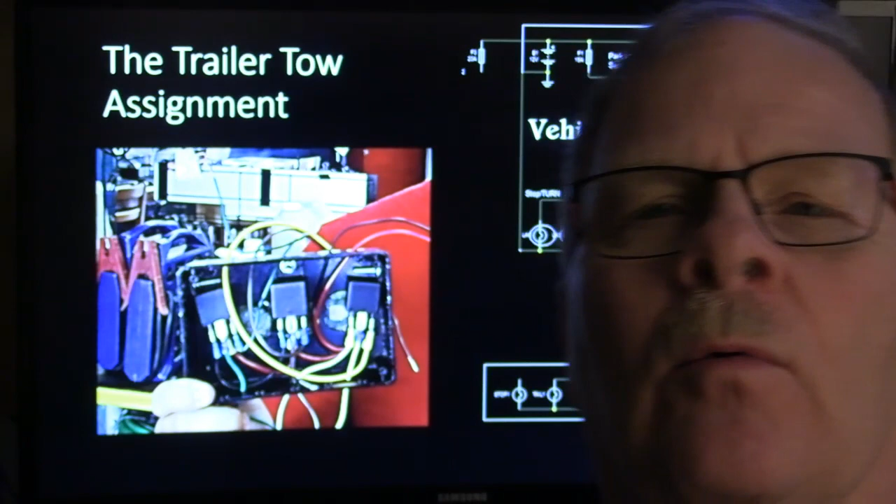What I did whenever I was teaching, well, when I was working at the dealership, I've mentioned before that if you hook up a trailer tow package by using Scotch locks and go into the wire feeding the tail lights particularly—turn signal not quite such a big deal, but tail lights—if you Scotch lock into that little 22 gauge wire feeding the lights on the car and try to pull a bunch of trailer marker lights, and you drive a long way to your fishing trip, 4, 5, 6 hours, sometimes it begins to cause all kinds of wiring problems.

But what I taught my students to do—I had an exercise that was part of their final. I had 3 relays in a box, and terminals they could crimp and plug in. I would get them to build a trailer tow package right here. This is basically just for training purposes, not one like you'd put on the vehicle. If you were putting it on the vehicle, you'd use a smaller box. But this one technically would work—it's just cumbersome because I needed to give them room to work. I had a picture of it on the worksheet so they could tell how they were supposed to do it.

But first I would make them draw a schematic. I had this representing the trailer, this representing the trailer tow package, and this representing the vehicle with the lighting circuits on that. One of the things they always seemed to struggle with was trying to figure out how to get power.

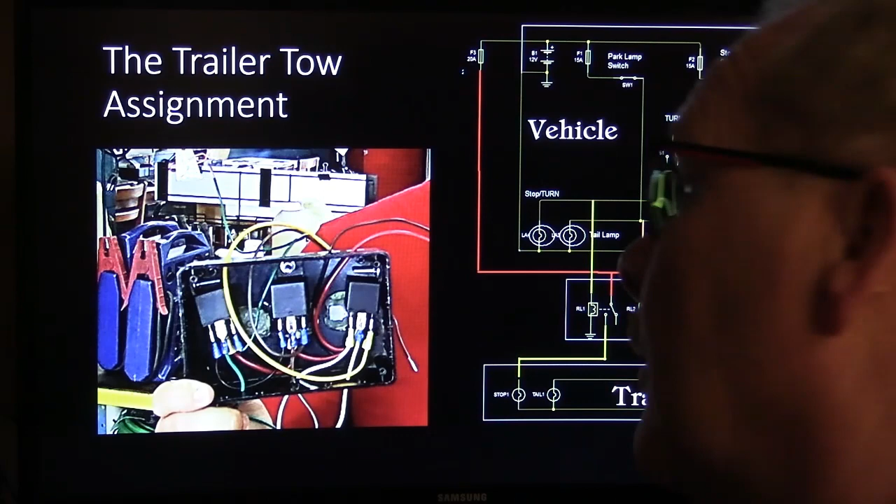You've got to bring power to these circuits here. The common terminals will not be where the power goes—well, actually it will be on this one, I was thinking about the other one. The common terminal is where the power goes, and this terminal has nothing connected to it. So whenever you turn on your stop or turn signal on that side, it energizes that and goes to your light. This is the same way on the other side. I should have made this brown, since that's usually the color on a lot of vehicles. But the trailer lights were the ones that typically caused the most problems.

So the coil is closed by the circuit from the vehicle, which puts almost no load on the vehicle circuit, and then the relay carries a dedicated power feed that goes to the lights on the trailer and that kind of thing.

Instead of doing that, there are trailer tow packages that a lot of automakers for years would make that had the relays already wired. You would just basically unplug a couple of connectors in a harness on some of them and plug in the trailer tow package that had the 3 relays in it, which protected the circuits and switches on the vehicle from having to carry those extra loads they weren't designed to carry.

So I actually had a little table that had some tail lights on it, and we would use one of these jumper boxes over here and hook this thing up so we could see if it worked properly. Of course, I could just look at it and see if it wired up correctly, but the students enjoyed watching it turn on the lights and all that kind of thing.

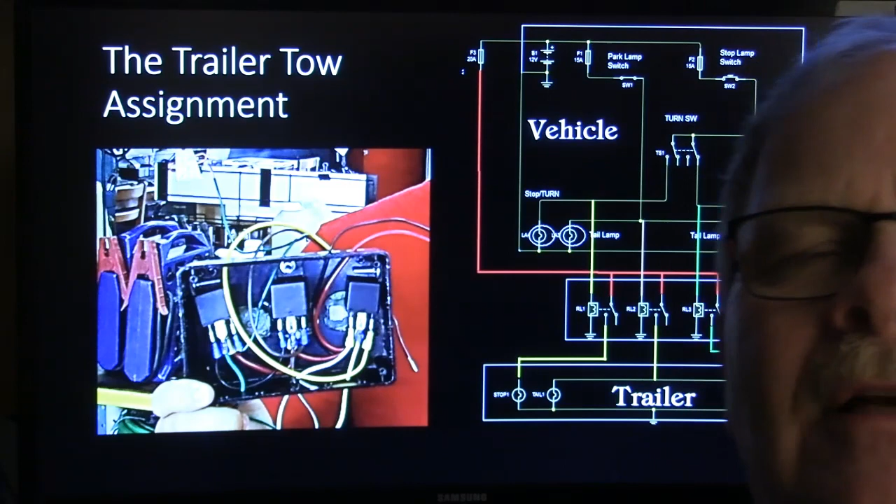The dye helps to find that kind of thing, obviously. I love dye. Now I'll tell you, there's a little confession I've got. You might remember some of the videos I've had on my Explorer where I was working on the AC. Well, I found a couple of leaks I could see, and I fixed those, and it takes about 3 weeks or a month for the refrigerant to go low again.

Well, I put dye in it, and I added a can of refrigerant, and after I put the dye in and put the refrigerant in there, I figured I'll drive this thing, and when it leaks out again, I'll get my black light, and I'll see where my dye is showing up.

Well, you also look to see if it's dripping out the evaporator drain, because that means your evaporator's leaking. I hadn't seen any dye coming out there. I can't see any dye anywhere, but I've still got a leak.

Now, we worked one time on a van where the guy at the college was complaining that we could charge his van completely up, pull everything out, pull it down, put a fresh charge of refrigerant in it, and within 2 days that thing would not be cooling again.

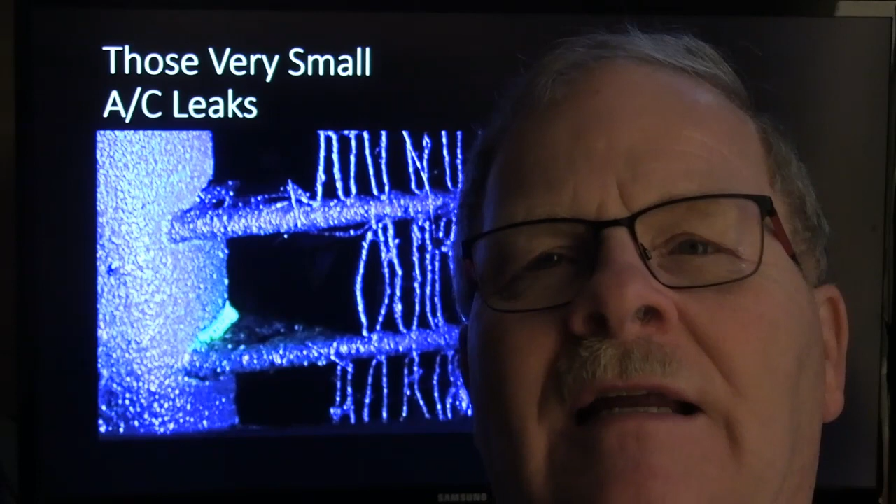You know, at Walmart you can buy a can of refrigerant for $4.88, until they make us all start going to R1234, which is, you know, 40 to 80 bucks a can depending on where you buy it, for little cans of that stuff.

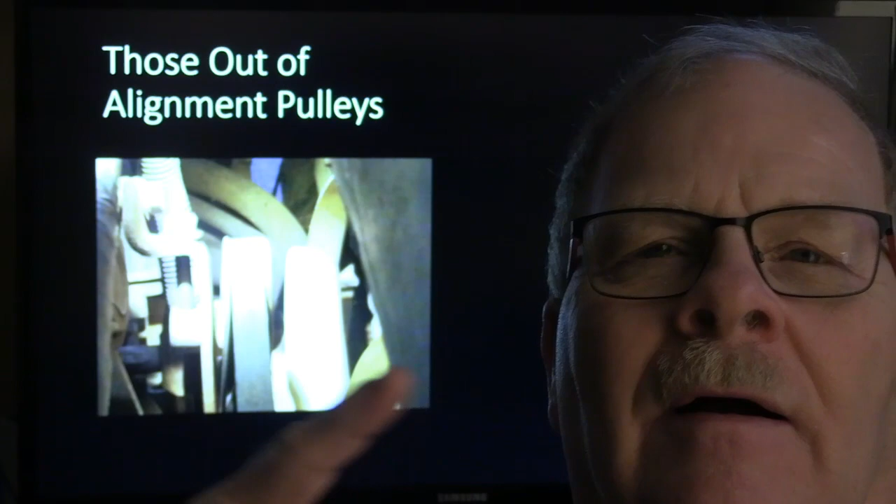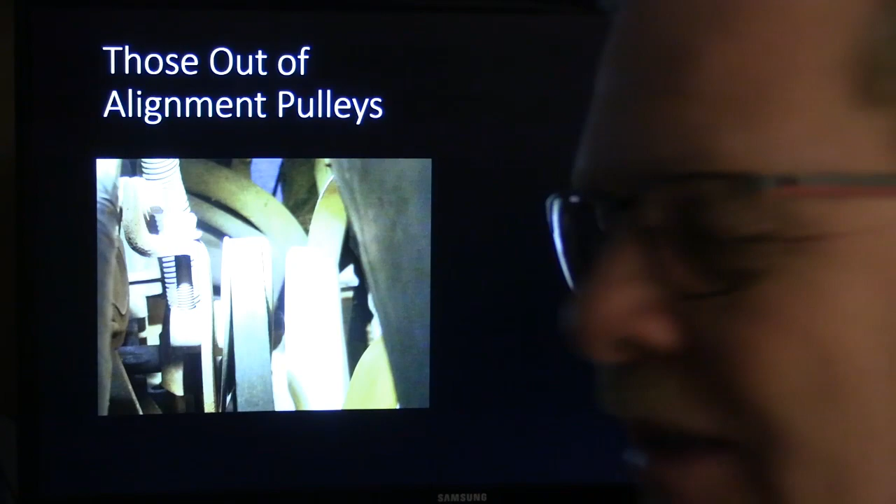These out-of-line pulleys on this V-belt, that being out of line is not such a big deal like it is on the serpentine belts. But one of the things I used to caution my students about, when you've got one of these draw bolts that moves that pulley, you can tighten this thing too much so that it wipes out bearings on one of the pulleys that belt goes around.

And I have seen down at the diesel department at the college where I worked, and there was an automotive department.

Occasionally somebody would take something down to the diesel department because they knew somebody enrolled down there. The guys in the diesel department who worked on this girl's Mitsubishi over-tightened the belt because they figured too tight was better than just right, I guess, and they wiped out the bearings in her AC compressor because of it.

So you have to pay attention to belt deflection and know when to stop. The downside is, with that little Nissan I had, if you don't buy good quality belts—some of the cheap ones the parts houses sell—you'll tighten the belt and it'll stretch a little and start to squeal. You'll tighten it again, and over a period of 4 or 5 days, it keeps stretching and squealing.

My Jeep Cherokee did that too. I put a serpentine belt on it, and it didn't have a spring-loaded belt tensioner—it had a draw screw you had to tighten. I tightened it up, felt good about it, but it would start to squeal, so I'd tighten it again. I had to do that usually 4 or 5 times. You don't want to over-tighten it the first time and wipe out the bearings, but if you're not careful, you end up working on it a lot.

They make belt deflection tools and all that, but I don't know if I've ever seen anybody consistently use one, to tell you the truth, because you can typically get by without them—and why would you even need one on vehicles with automatic tensioners anyway.

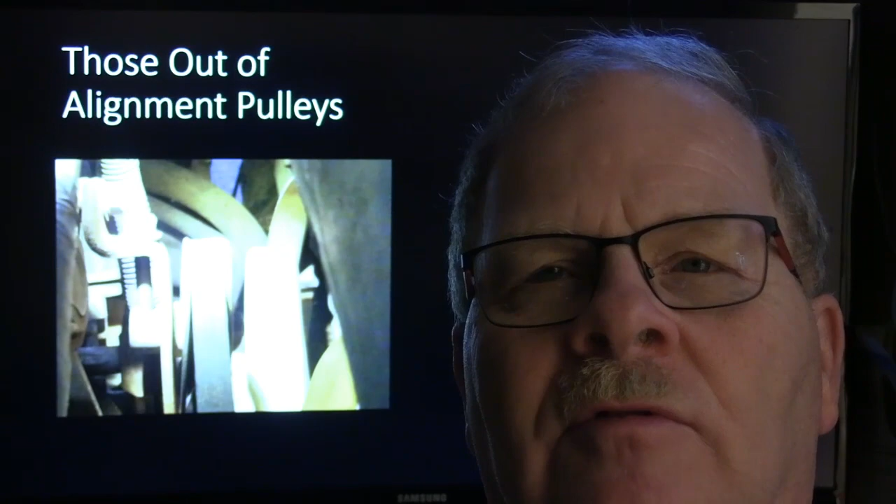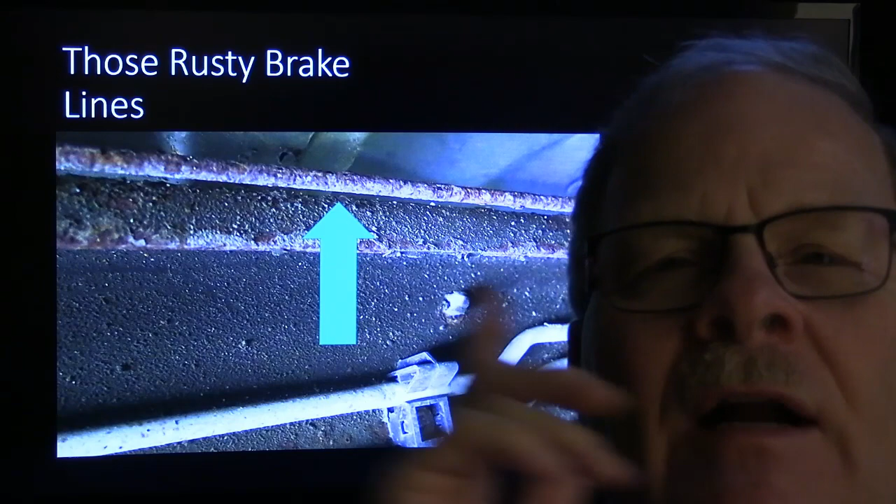So these rusty brake lines—this was on that Chevy truck I was talking about earlier, where the guy came in and said he needed a master cylinder. After we put it on, since I thought he kind of knew what he was talking about, it still didn't have good brakes. This line right here was leaking fluid. It hadn't been breached up in this area even though it looks really bad—it was way back in the back. Fluid was dripping out from under it whenever you applied the brakes hard.

We had to replace this line with some of that nickel-copper alloy stuff you buy at the parts store. It's really fun and easy to work with, and you can double-flare it very easily.

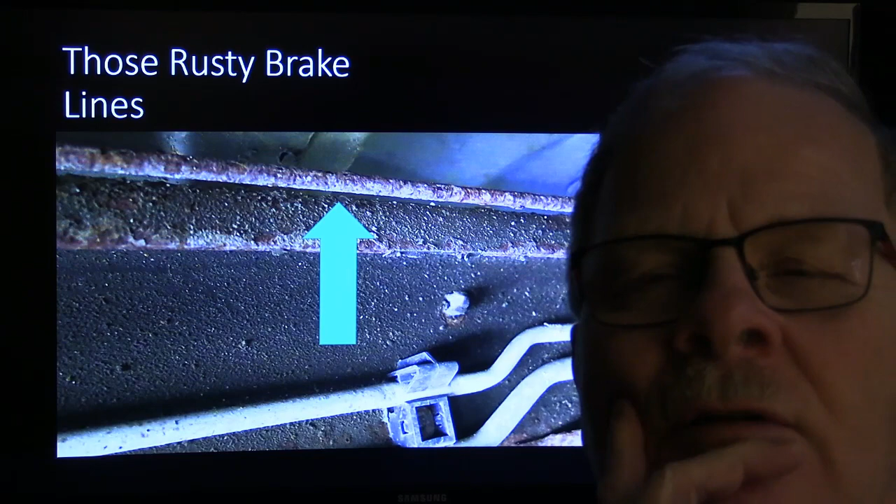Keeping the tools in order, at the college—when you've got a whole bunch of people working, everybody's really supposed to have their own set of tools. I used to tell my students, if you can't afford to buy a set of tools, you're going to have issues when you leave, because at any shop they're going to want to know if you have your own tools, what kind, and whether you have enough. So you basically need to have your tools.

I used to tell them, get some tools together—by the time you finish the program, if you go to work at a shop, you're going to have your own tools. But if I required everybody to have a full set from day one, I'd lose about half my students. So I'd encourage them to go to Harbor Freight or somewhere like that if they were financially embarrassed.

This pegboard setup I came up with isn't really uncommon, but when I put tools on pegboard and labeled each place where each tool went, that worked better than anything else. If I had the toolbox set up with sockets in a certain place and wrenches in wrench racks and all that stuff in there...

They always tended to find a drawer that didn't have a lot of stuff in it, and when they went to put the sockets back, they'd just throw them in that other drawer instead of putting them back where they belonged in the socket drawer. That used to just burn me up. I'd spend 2 or 3 days putting the toolbox in order before a semester started when I was there by myself.

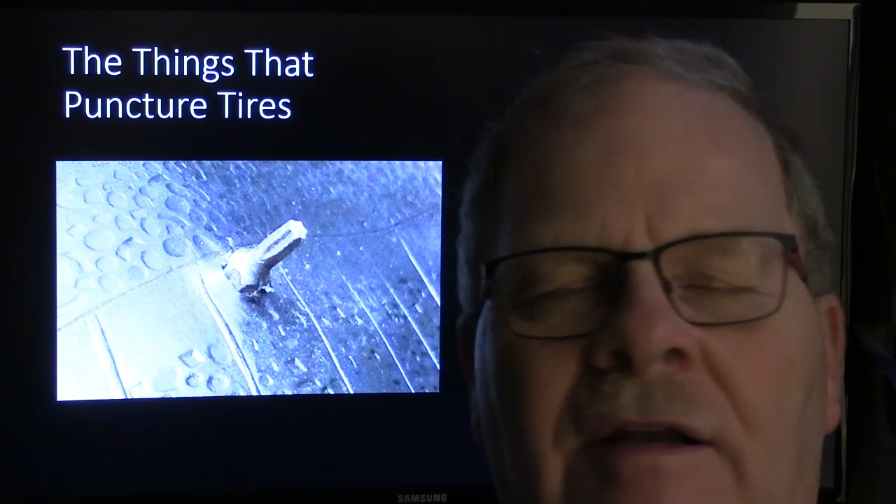Paul Harvey was talking years ago about a guy that ran over a bumper jack laying in the road, and it came through the floorboard up into the car and killed him. I mean, who expects something like that, you know?

Now, I will tell you that the German guy, when he put the wires on the starter relay back there, got them on backwards, so it wouldn't work right because of that. I actually mentioned that in another video. But that got her going again on her Expedition — she found that engine somewhere, got it to us, and it cranked and ran really good.

Here's what everybody needs to remember, and I came up with this myself while writing a lesson: performance, attitude, integrity, and dependability. If you are short on any of those, you're not going to do very well in any industry.

So if you can't perform — in other words, if you can't do the job — you're just not going to do well. And if you can do the job but your attitude is bad, you're going to have issues with that.

And if you don't have any integrity, sooner or later they're going to find out that you've been stealing or haven't been doing your work, and then you're going to be out of there for that reason too. Dependability, you need to show up for work every day.

Those are fairly simple. I did hear on Fox News a while back another interesting thing. They said that whenever people lose six-figure jobs, over $100,000 a year, the primary reason is profanity. They can't keep cuss words out of their mouth. So whenever they use filthy language, that's the chief reason those jobs are lost. People get fired for using profanity.

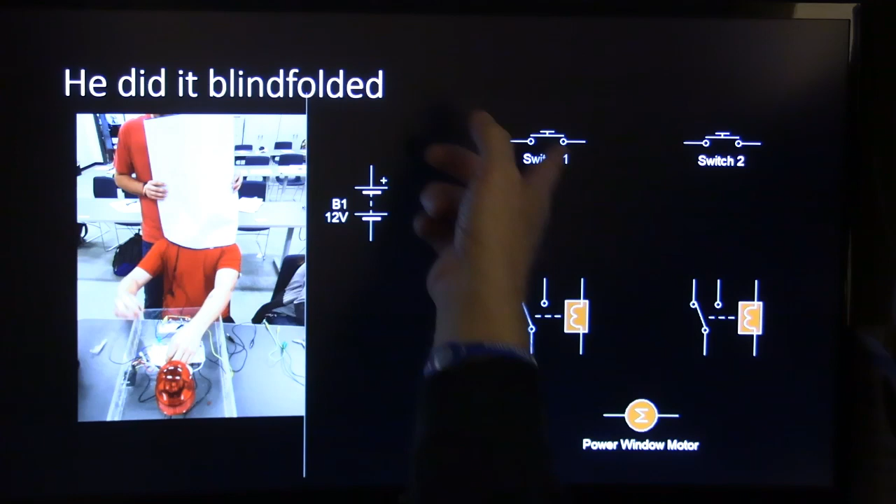All right, what we got here is this student's exercise using two relays, two switches, a power source, and a power window motor, so that when you mash this switch the motor turns one way, and when you mash that one it turns the other way. I used to give people this and say, figure out how to wire this up so it'll work this way.

There was a girl at that dual enrollment center I'm talking about, and when I put this on the board, she didn't have any automotive training whatsoever - long frizzy red hair and all that. I'd have her go up to that big touchscreen board where you could draw with your finger, and say, this is your objective, show me how to do this. She'd never seen anybody do it, but using her finger on that board, she drew that schematic flawlessly, and it worked perfectly the first time. I was just blown away by that, I couldn't believe it.

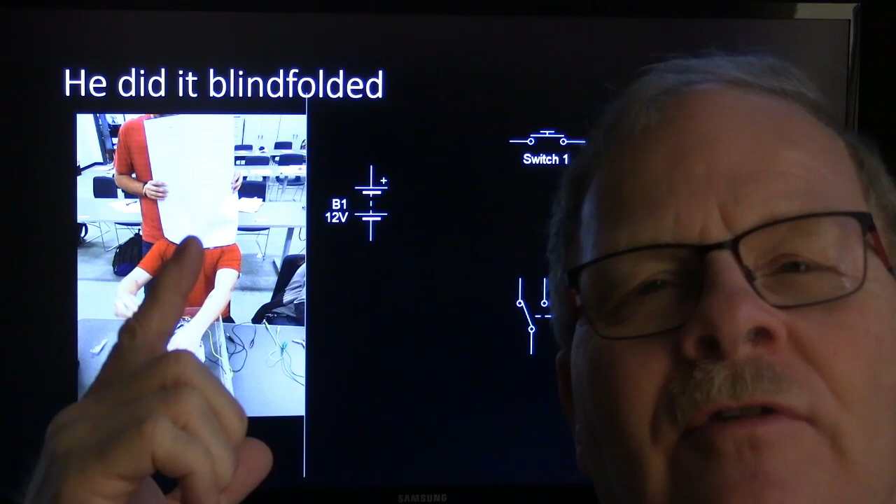But anyway, this guy right here, he was really sharp too, a red-headed guy. He says, I can do this blindfolded. So he had another student hold a poster board in front of his face and just feel into the wires. This board had a little whirly-bird light on it that would spin one way and then another, and that little whirly light was visually interesting when you did that.

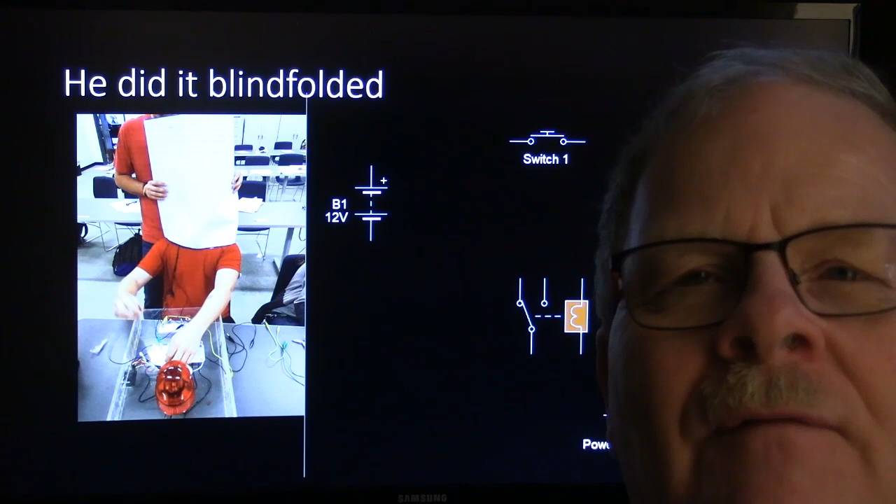If you did it right, everybody could tell by the fact that when you push one button the light would spin one way, and when you push the other button it spins the other way. That's how you wire it up: basically your switch operates the coil, the common terminal goes to the motor, the normally closed terminal is grounded, and this one here is powered. He did that in a fairly short period of time.

I built this board out of junk, except I bought that light right there, the switches and relays and stuff. But this plexiglass board, somebody else had come up with that.

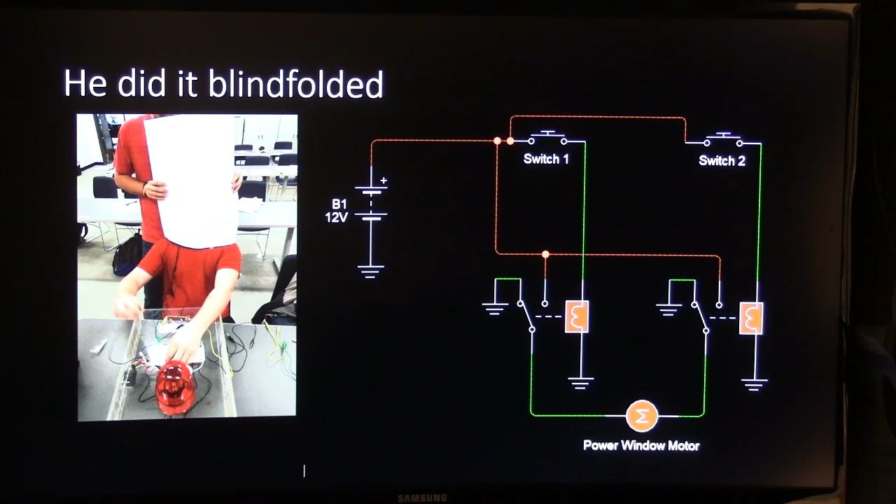I like to build my trainers because I enjoy building them, and because I can custom make a trainer where it will really teach somebody an awful lot really quick. It's not like some of the trainers you buy that are $6,000 or $8,000 or $10,000, and after you look at it for about 5 minutes you've learned everything it can teach you, then you want to move on to something else. I like something you can get bang for the buck out of, and these little boards I built did just that.

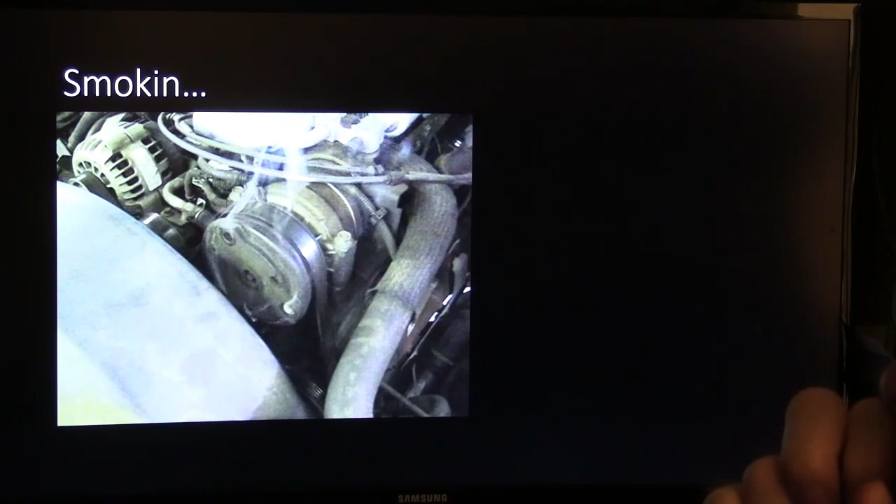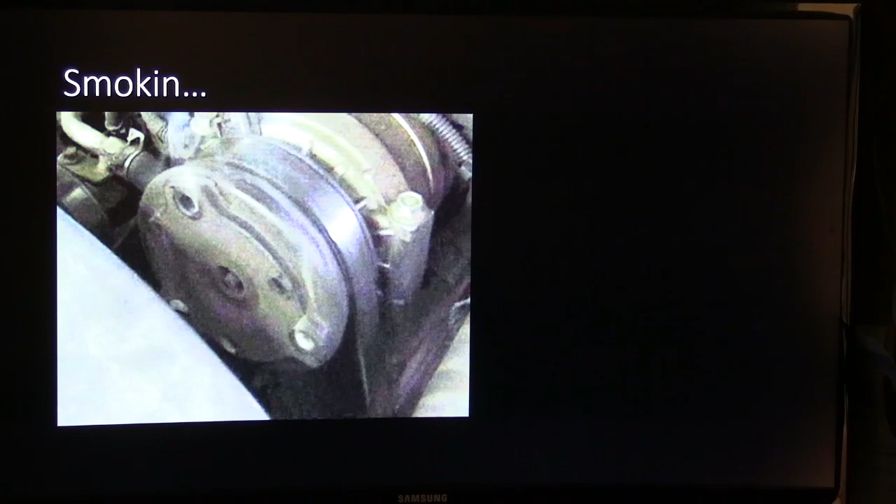All right, how about that smoking clutch? I always like to take a little video when something like that happens. This can happen for a number of reasons - if that thing is worn down to the point where it's dragging against there all the time, or whenever it's slipping, or if you energize the clutch and the compressor's locked up and the pulley's still spinning but it can't spin that, it'll make it smoke like that. That was a cool little piece of video I had.

It was still not completely at ease with machines. There had to be a confrontation. The machine had to be put in its place. But this was the first time that a vehicle, they claim, outran a horse, and everything changed after that.